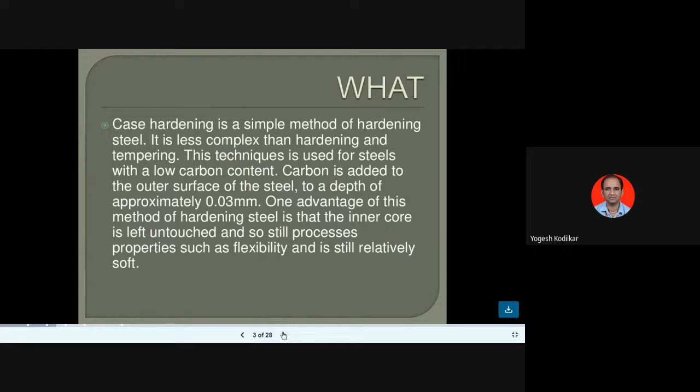So both types of surfaces can be achieved in this case hardening process. Such components require good toughness, but a very hard and wear resistant surface also, especially parts rotating against each other. Gears engage each other and rotate at several thousand RPM, so the gear must have good hardness and good toughness on the outer surface.

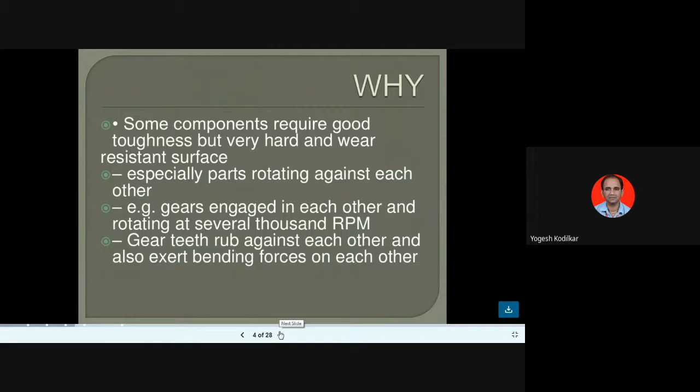Gear teeth rub against each other and also exert bending forces on each other. So carburizing and hardening. We're adding the carbon. In carburizing, carbon is added to a certain depth on the surface.

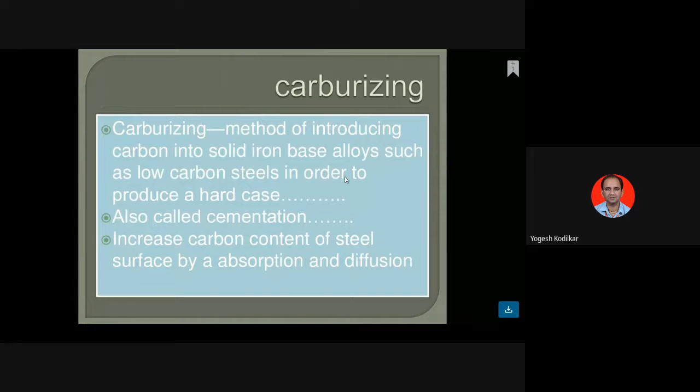So the outer casing must be harder, hard enough, while the core may remain as it is. That is the case hardening process. In case hardening only the outer casing is treated. Carburizing increases the carbon content of steel by absorption and diffusion.

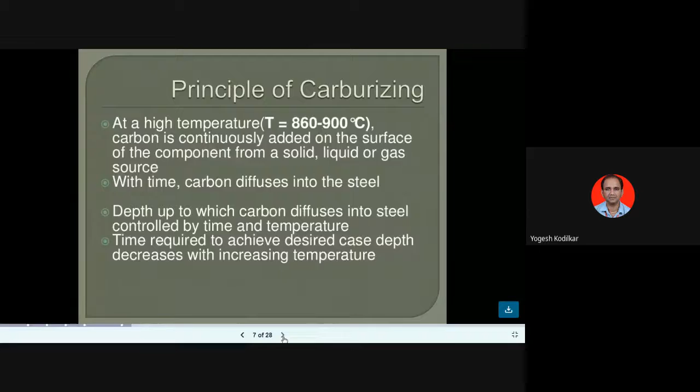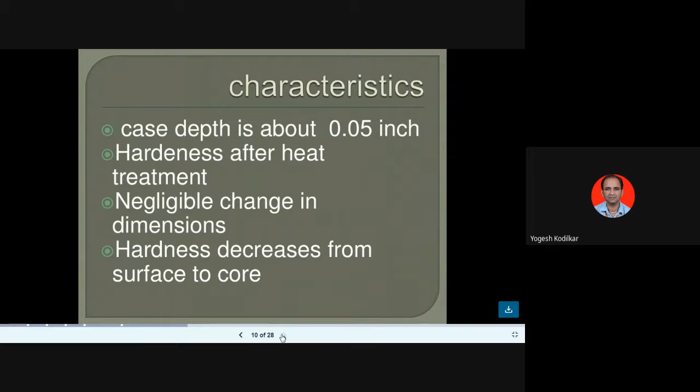That is the main characteristic. Then these are the three types of carburizing methods: pack carburizing, gas carburizing, and liquid carburizing. So pack carburizing involves packing components into a cast iron or steel box along with the carburizing material so that a space of about 0.50 mm exists. So that is pack carburizing, also called box carburizing. It involves packing the component.

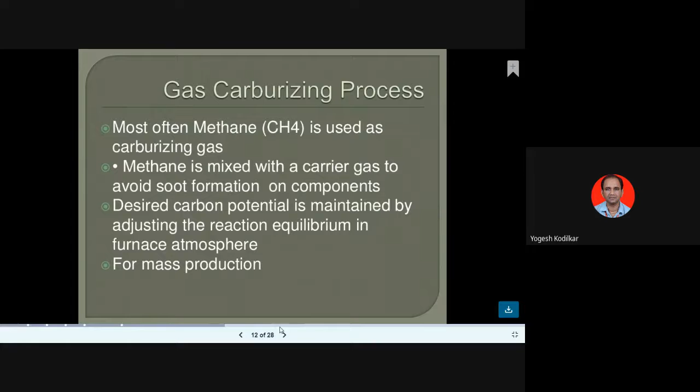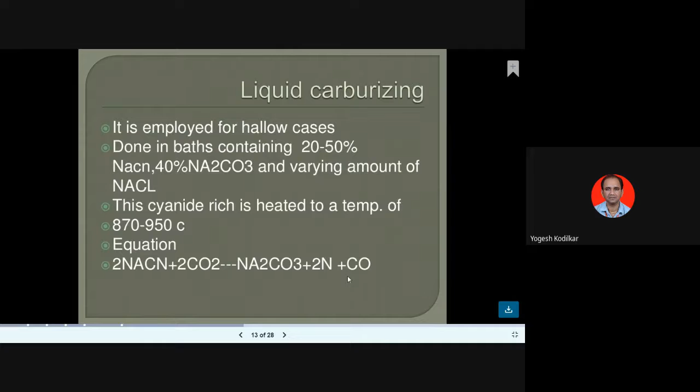Then third is liquid carburizing. It is employed for shallow cases, when I want case hardening up to less depth. It is done in a bath containing 20% to 50% sodium cyanide, 40% sodium carbonate and varying amounts of sodium chloride. This bath is heated to about 870 to 950 degrees Celsius and the sodium cyanide reacts, giving the carbon rich material. So that is liquid carburizing. The choice depends on the characteristics desired, the equipment available and the quantity of parts to be handled.

Then next, the case hardening process we learned is nitriding. In nitriding, the steel is exposed to a nitrogenous atmosphere.

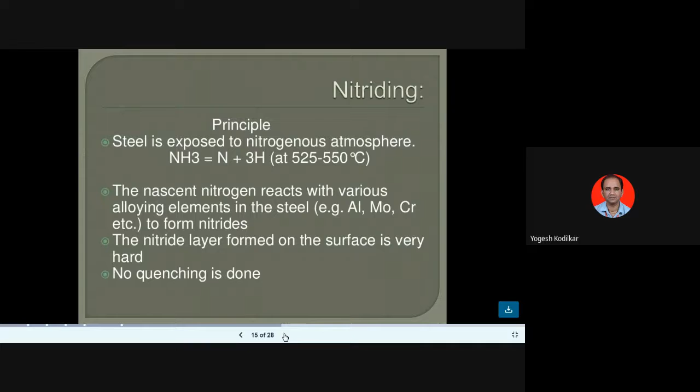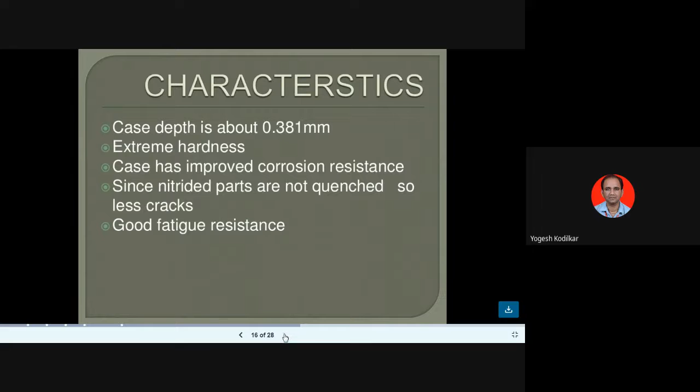The nitride layer formed on the surface is very hard. No quenching is done, since the surface is already very hard. Case depth is about 0.381 mm. Extreme hardness we can achieve. The case has improved corrosion resistance also. Since nitrided parts are not quenched, there is very less cracking and good fatigue resistance.

Then, just as we added carbon in carburizing and nitrogen in nitriding, similar to that there is the cyaniding process, called carbonitriding, in which we add both carbon and nitrogen. So in cyaniding, carbon and nitrogen are introduced into the surface of steel by heating it to a suitable temperature and holding it in contact with molten cyanide.

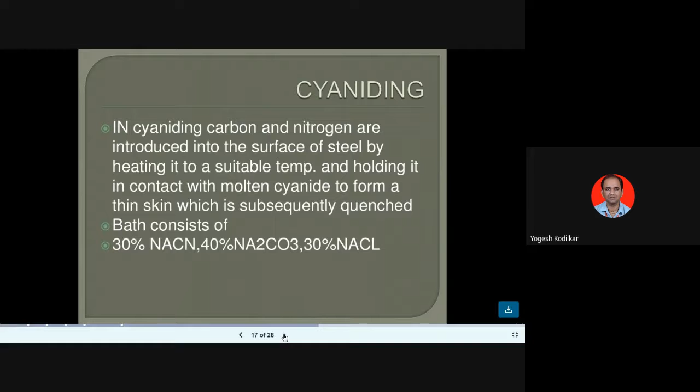Molten cyanide च्या quantity मध्ये ठेवायचं थोडा वेळ to form a thin skin which is subsequently quenched. So bath मध्ये काय असतं? 30% sodium cyanide, sodium carbonate is 40% and 30% sodium chloride. So case depth about 0.25 mm we can achieve. Negligible changes in dimensions. Distortion may occur. Typical uses: screws, nut bolts, small gears are given the cyaniding heat treatment.

Then we studied surface hardening also. That is induction hardening. So induction hardening मध्ये काय करतो? We are keeping that component which is to be given the hardening by induction hardening. That component we have to place in that induction coil.

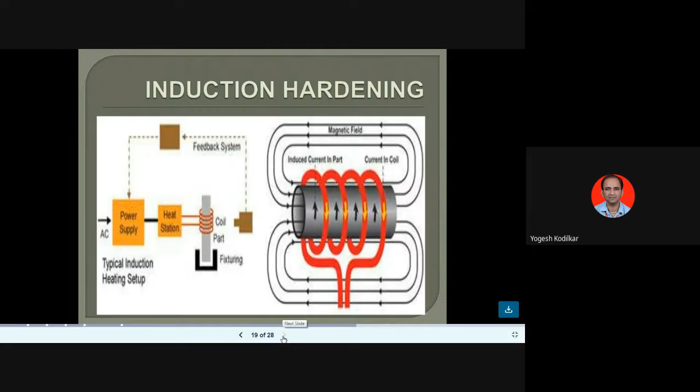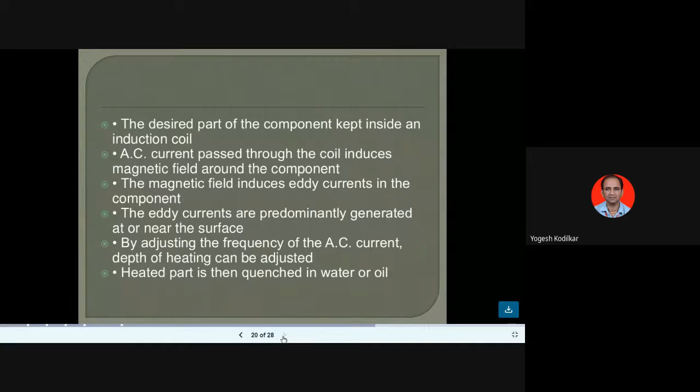The desired part of the component is kept inside an induction coil. Induction coil मध्ये ठेवला जातो तो. AC current passed through the coil induces a magnetic field around the component. The magnetic field induces eddy currents in the component. The eddy currents are predominantly generated at or near the surface. By adjusting the frequency of the AC current, depth of heating can be adjusted. Heated part is quenched in water or oil. Water मध्ये or oil मध्ये quenching केला जातो.

Induction hardening is used where selective parts of heavy duty components have to be case hardened. Heavy duty component मला जे काय harden करायला लागतं तेव्हा मी induction hardening वापरतो. Since no carburizing is done, the induction hardened part has medium carbon content, typically equivalent carbon content of 0.4 to 0.45%. Examples of applications are crankshafts, ज्यांना induction hardening करायला लागतं.

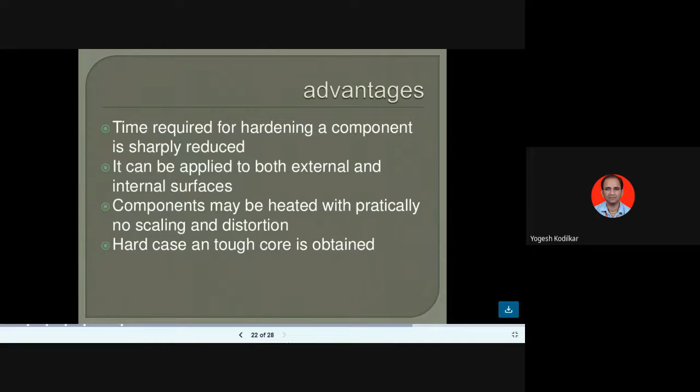त्याचे advantages काय आहेत? Time required for hardening a component is sharply reduced. It can be applied to both external and internal surfaces. Components may be heated with practically no scaling and distortion. And hard case on tough core is obtained. Core कशी असते? It remains tough as it is. हे disadvantage आहे: cost of equipment is high. Induction hardening मध्ये cost is high.

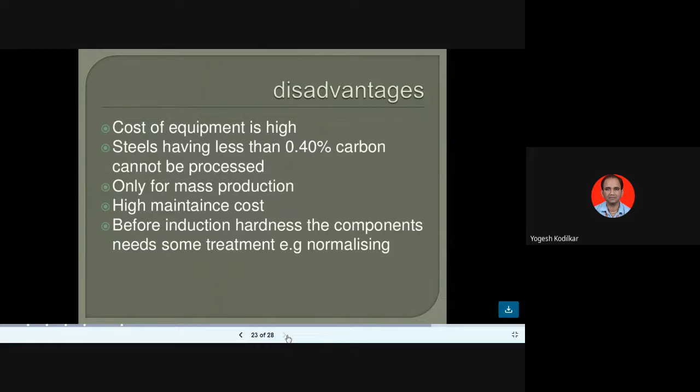Steels having less than 0.40% carbon cannot be processed. त्या स्टील मध्ये 0.40% कार्बन कमी आहे त्यांना प्रोसेस करू शकत नाही आपण, and it is only used for mass production. Maintenance cost is also high. And before induction hardening, the component needs some heat treatment like normalizing. त्याला normalizing heat treatment करावी लागते.

Then flame hardening आपण शिकलो बरोबर. What does flame hardening mean? Flame hardening is a surface hardening method that involves heating a metal with high temperature flame followed by quenching. It uses medium carbon mild or alloy steel or cast iron to produce a hard wear resistant surface. Flame hardening uses direct impingement of an oxyacetylene flame, oxygen and gas flame, onto a defined surface area. ज्या surface वर मला hardening करायचं त्या surface वर मला heating करायचं आहे.

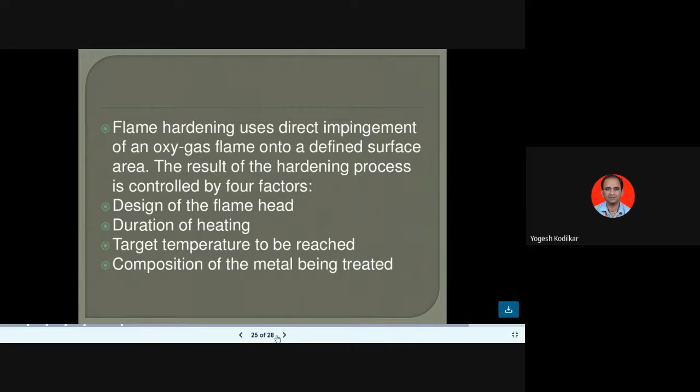The result of the hardening process is controlled by four factors: design of the flame head, duration of heating, target temperature to be reached, and composition of the metal being treated. ठीक है. Now these are the four types of flame hardening: stationary flame hardening, progressive flame hardening, spin flame hardening, and combination flame hardening.

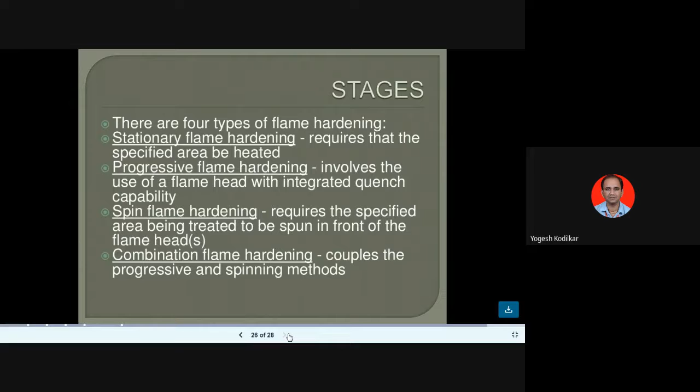Advantages काय आहेत flame hardening चे? Increased wear resistance, less distortion, reduced processing time, ability to use low and medium carbon steel, reduces cost by hardening only selective areas, and achieves high hardness, less machining and grinding than other methods. So that is your case hardening and surface hardening.

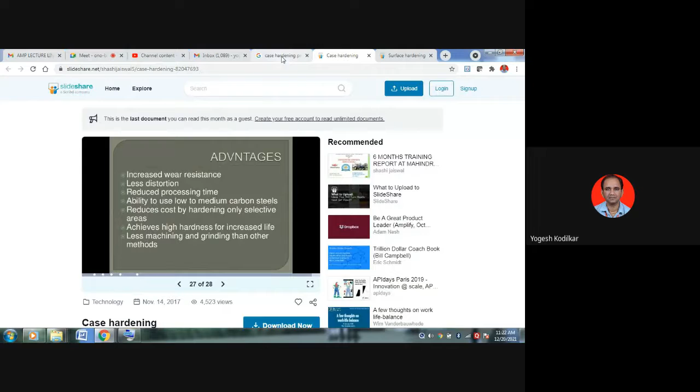Now we'll see the difference between case hardening and surface hardening. You know, the important part in previous offline question, case hardening process and...

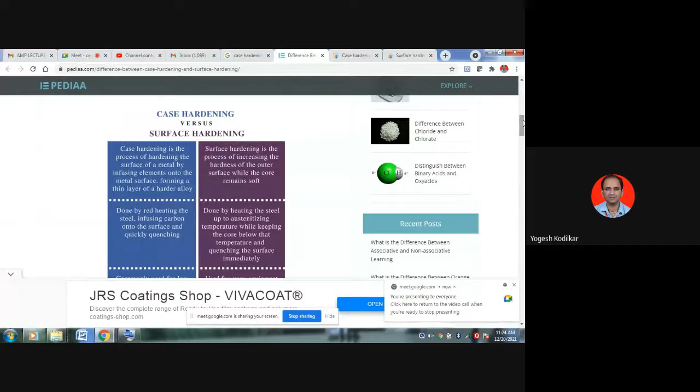मग केस हार्डनिंगमध्ये आपण बघितलं, we are changing the chemical composition. Whereas in surface hardening there is no change in chemical composition. We are just only heating. So पहिला डिफरन्स बघू. Case hardening is the process of hardening the surface of metal by infusing elements onto the metal surface. बरोबर, त्यात काय diffuse केलं होतं ना, diffusing होतं, infusing होतं, forming a thin layer of harder alloy.

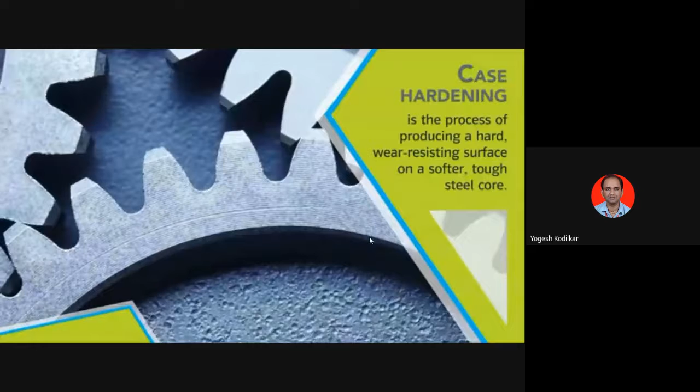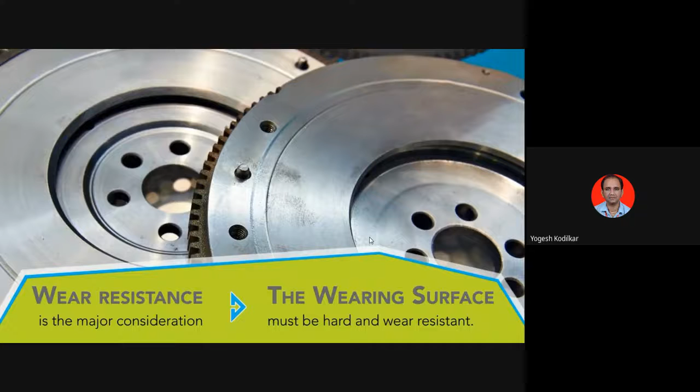Case hardening is the process of producing a hard, wear-resisting surface on a softer, tough steel core. In many metallurgical applications, strength is of minor importance and wear resistance is the major consideration. In such cases, the center condition of the steel is relatively unimportant as long as the wearing surface is hard and wear resistant.

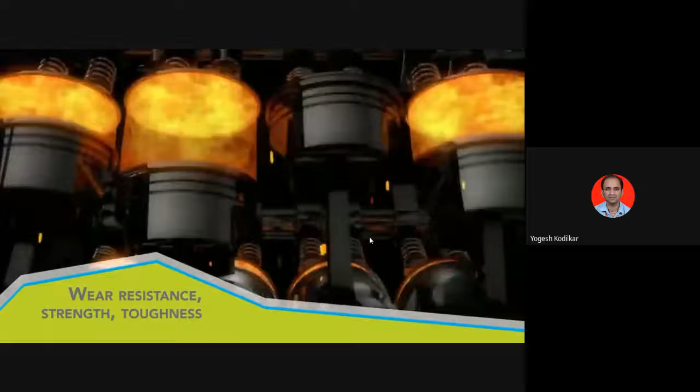In other applications, where wear resistance is still the prime consideration, a high level of strength and considerable toughness are also required. In such cases, a hard wear-resistant surface backed up by a strong and tough core is necessary. To produce the two conditions just described, it is necessary to depart from the conventional hardening treatments and employ specialized techniques that result in a relatively thin surface layer of the steel being hardened. This thin layer is termed the case.

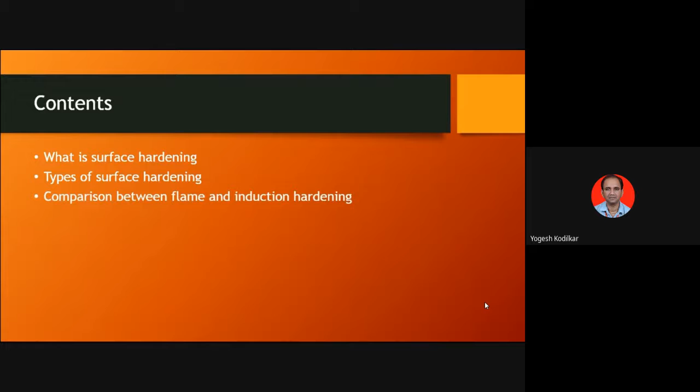So let's begin with our today's video. So what we will be discussing today is what is surface hardening, the types of surface hardening, and then we'll compare flame hardening and induction hardening. Okay. So let's begin. What is surface hardening?

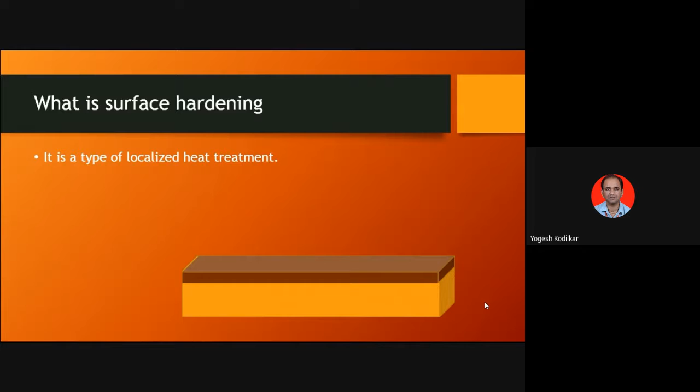Surface hardening is nothing but a process in which we are trying to alter the surface properties of the component, and we are not going to change the inner core properties of the component. Okay. So it is nothing but a localized heat treatment. The entire component is not getting hardened, or the entire component is not getting heat treated.

Only a particular area or a particular surface of the component is getting hardened. And the main thing to keep in mind is in surface hardening, the chemical composition of the component is not changed. So what we are trying to do over here is we are just trying to heat the particular surface of the component and then immediately we will quench it with water. Now based on this heating, there are two methods, flame hardening and induction hardening.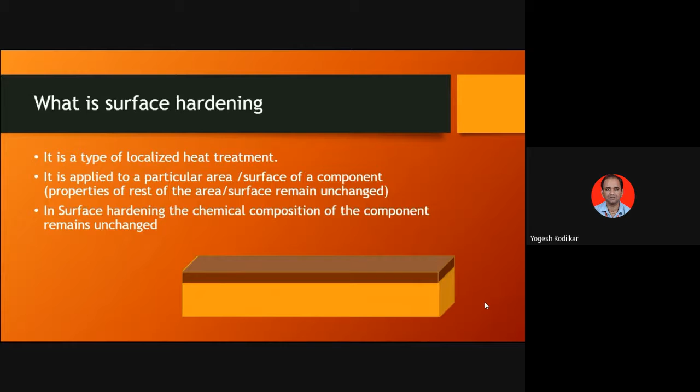So in case of flame hardening, what I will do is, this is my component. I will try to heat it with the flame. Now as I start heating it, the surface becomes red hot. Now as it becomes red hot, immediately I'll quench it with water. As I immediately quench it with water, I get martensite at the surface, which makes the surface hard.

The main difference between flame hardening and induction hardening is the type of heating. In flame hardening, I'm using a torch. In induction hardening, I'm using induction heating. So let's see the difference. In flame hardening, we are using the gas or a torch to heat the surface. In induction hardening, we are using a heating coil or induction heating.

And another thing is, in flame hardening, as the heating is manual, the depth of hardness is not uniform. Because in this case, this flame is not going to have a uniform heating all over the surface. So because of which, I am not going to get a uniform depth of hardness all over the surface in case of flame hardening.

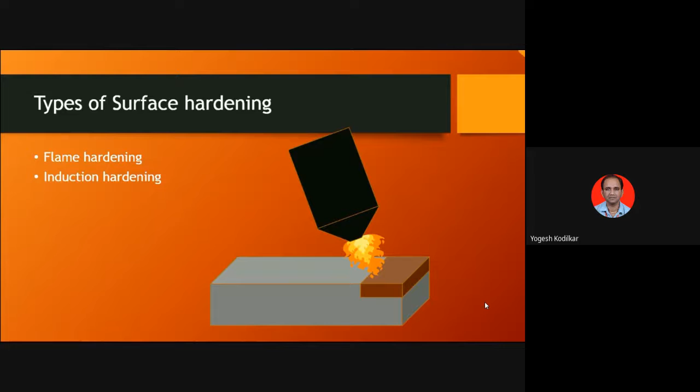But this is not going to happen in case of induction hardening. Due to induction heating, I am going to get a uniform depth of hardness. So every time we are using induction hardening for doing surface hardening. Flame hardening we are using a bit less because the depth of hardness is not uniform. So this was the main difference.

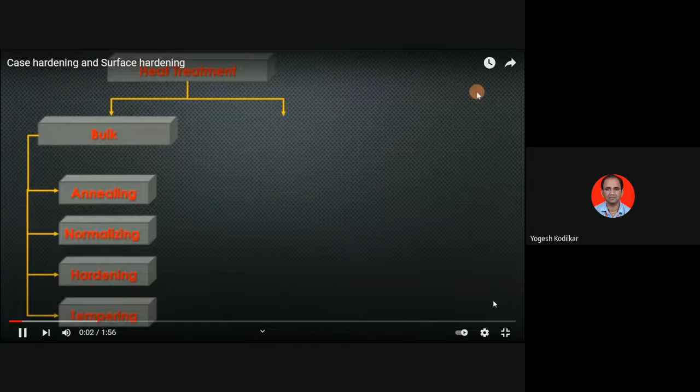In my previous video, we were discussing annealing, normalizing, hardening, tempering. All these processes are done for the entire component. Today, let us discuss something called localized heat treatment. In this, a particular surface or a particular area is getting heat treated. That's also known as surface hardening.

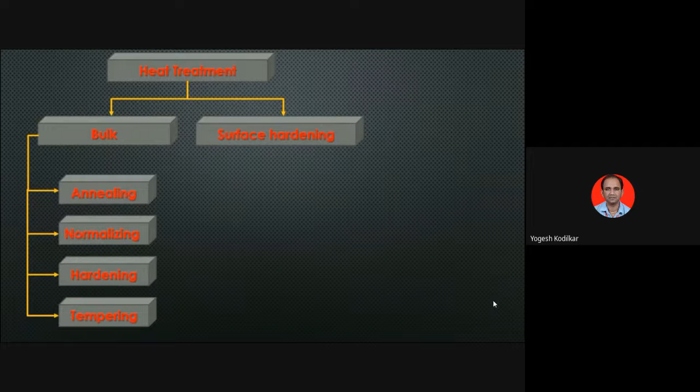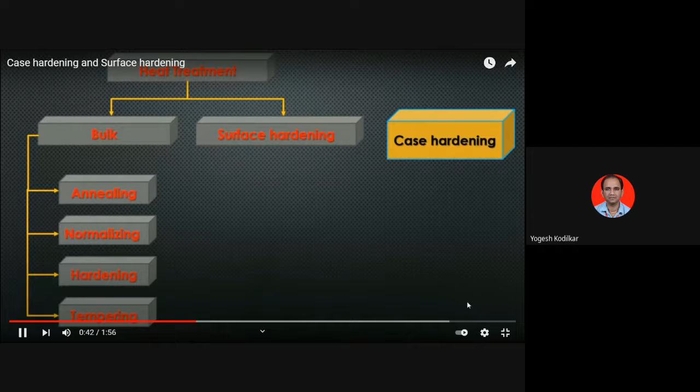Whenever we hear surface hardening, one word comes in our mind, that is case hardening. See, case hardening and surface hardening are different processes. Let us understand the difference between surface hardening and case hardening. The aim of both the processes is the same, that is to treat the surface of the component without impacting the inner core or the inner region.

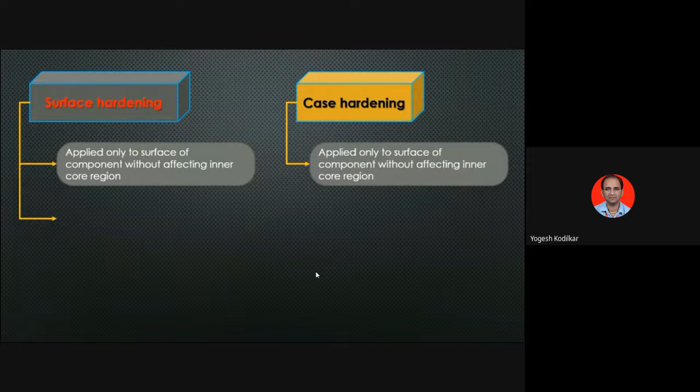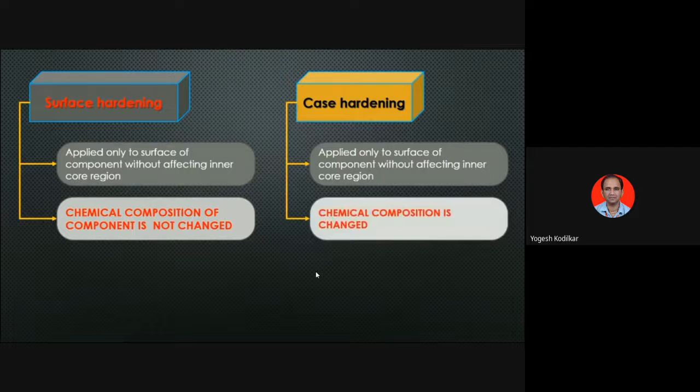and case hardening is done for those components which are having low hardenability. For example, surface hardening will be done for medium carbon steel or high carbon steel. And case hardening will be done for low carbon steel, like mild steel.

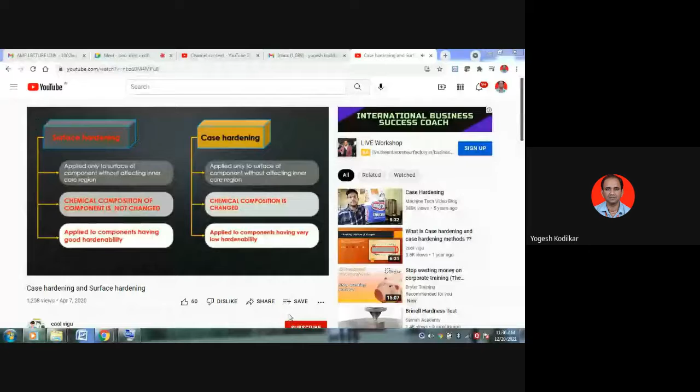Hi, I'm Adam. And I'm Todd. This is the Machine Tech video. And today we're going to show you how to case harden steel.

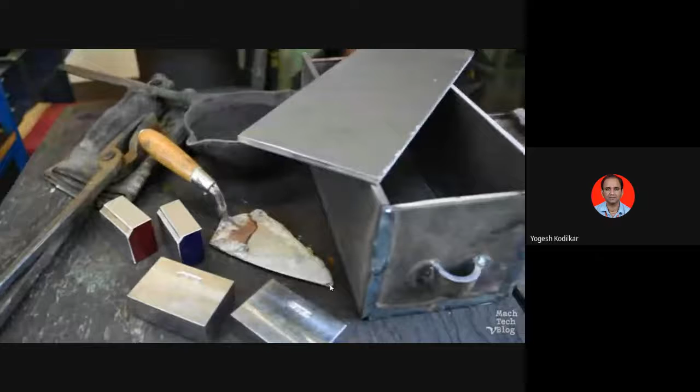One of the most common projects for machinist apprentices and students is to make these 1-2-3 setup blocks, which machinists use for practically everything in the shop. They're rough machined and then surface ground to precision parallelism, perpendicularity, and flatness of the surfaces.

Since they're going to be used as tools, it's common to heat treat them to harden them so that they're more wear resistant. But the problem is that these are made out of 1018 steel, which is a low carbon grade. It's a good general purpose steel, but it doesn't have enough carbon content to really heat treat and harden properly in the furnace. The solution, of course, is to add more carbon.

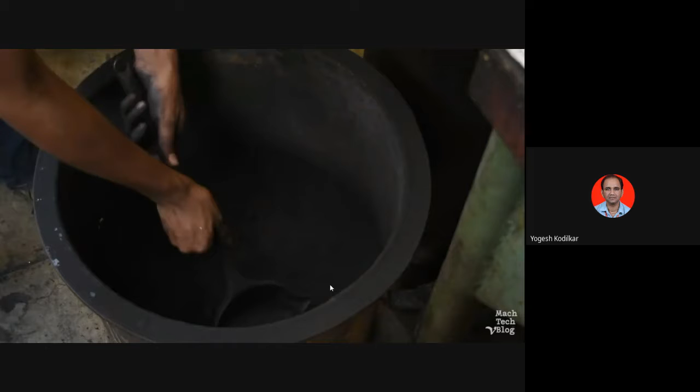Lay down about an inch of carbonaceous material in a steel box with a tight-fitting lid. Yes, we really are using broken-up charcoal briquettes because it actually works pretty well.

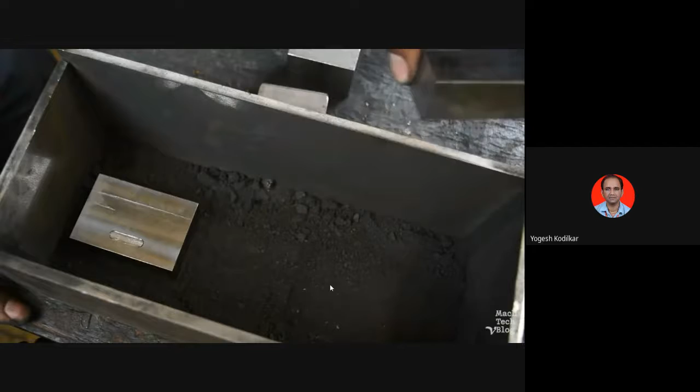Arrange the blocks so that they're not touching each other or the box. Go ahead and put in one or two pieces of 1018 steel scrap so we can test the hardness later without putting divots in the finished parts.

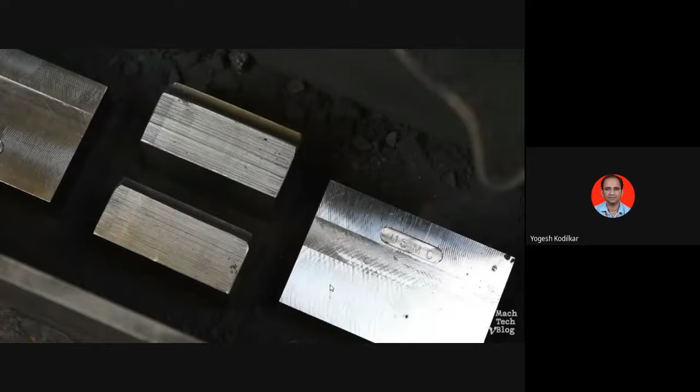Then pour enough carbon on top of the blocks to cover them by at least one inch.

Put the lid on top of the box and fill in any gaps with fire clay or refractory mortar to form an airtight seal. The mortar should ideally be a little thicker than this.

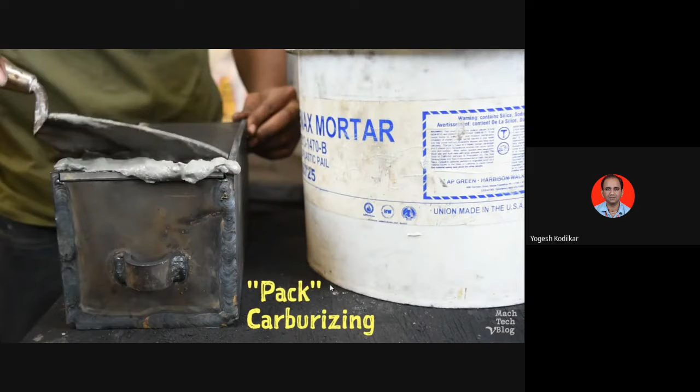The method we're using to add carbon to steel is called pack carburizing. Pack carburizing is only one of several ways to add carbon to steel, and it's the slowest and most labor-intensive method. For this reason, it's not really a viable commercial process anymore, but it is used frequently in small shops.

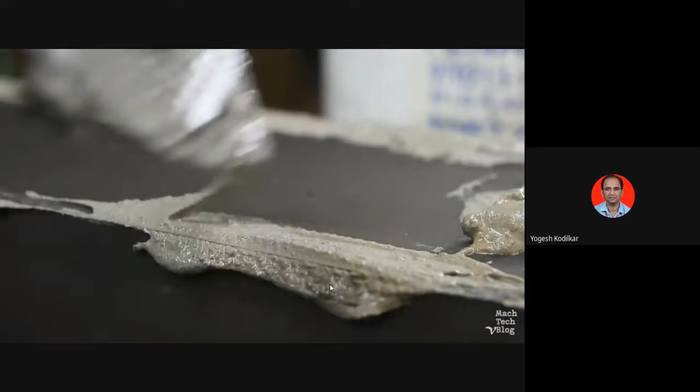Now it's time to load the box into the cold furnace.

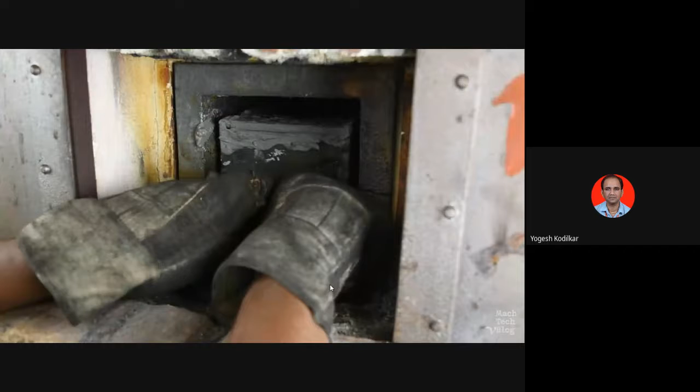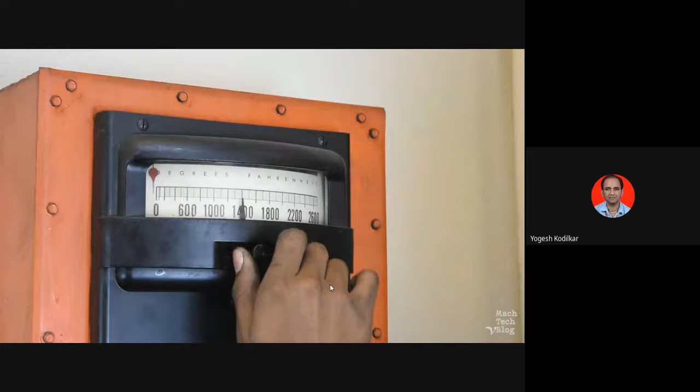We'll leave the box in the furnace to carburize for 8 hours.

Since we've got some time to kill, let's measure the hardness of a piece of untreated 1018 steel using a Rockwell hardness tester.

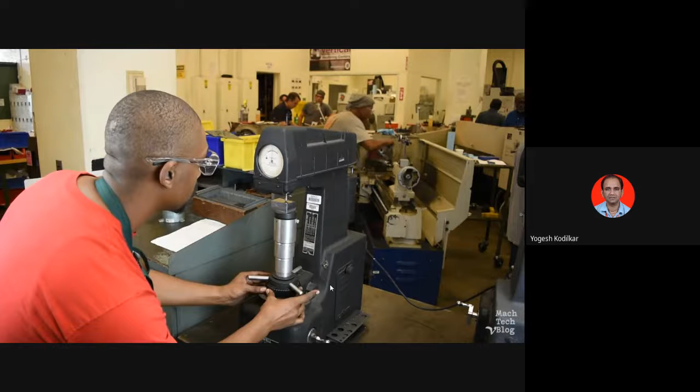The test is simple. An indentation is made in the material using a diamond tip and a calibrated force. The size of the indentation determines the material's hardness. The diamond tip will penetrate deeper into the surface of softer materials than harder materials. A higher number on the Rockwell C scale indicates a harder material, with the scale topping out at 100.

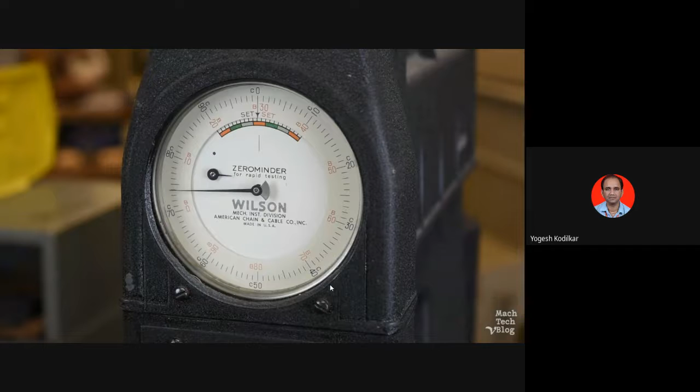Our untreated piece of 1018 steel comes out to 10 Rockwell C, which is really not very hard at all.

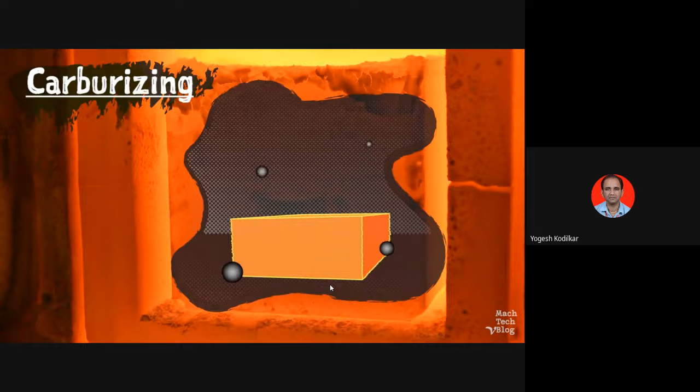But inside the furnace, there's a bit of science magic happening. Carbon-rich gas comes in contact with the metal surface, breaks down, and some amount of free carbon is dissolved into the hot steel. Time, temperature, and the composition of the atmosphere all affect the rate at which carbon is absorbed and how deeply it penetrates into the steel.

After 8 hours at 1700 degrees, the carbon should penetrate 1/16 of an inch into the part.

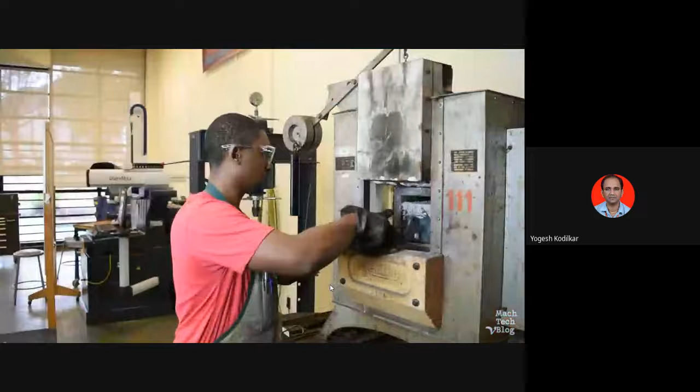After letting the parts cool in the furnace overnight, it's time to take them out.

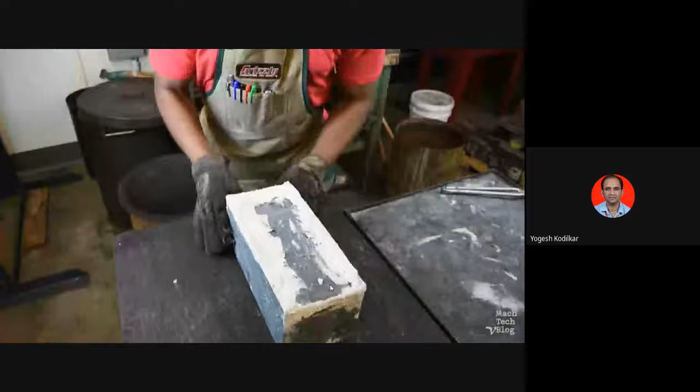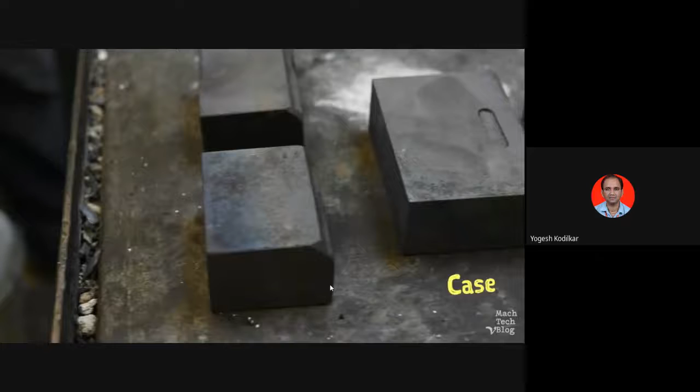Remove the carburized parts. They're still soft right now, but the finished parts will have a tough, low-carbon core and a hardened, high-carbon surface layer called a case. This is because the carbon only dissolves to a certain depth, so the hardening process will only affect the outsides of the parts. That's what makes this process case hardening as opposed to through hardening.

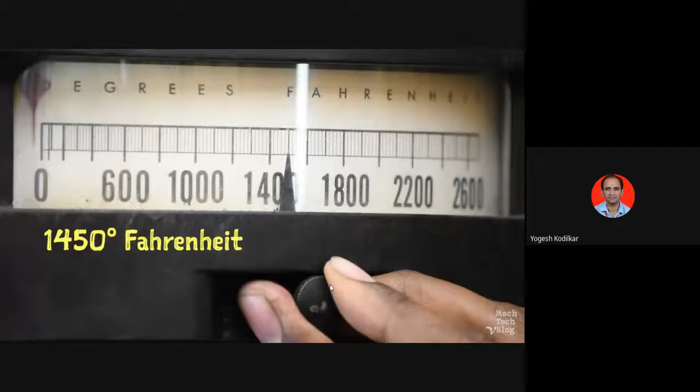Turn the heat up to 1450 degrees Fahrenheit, and then put the parts back into the furnace. We only need to get the parts up to temperature, so 10 to 15 minutes should do the trick.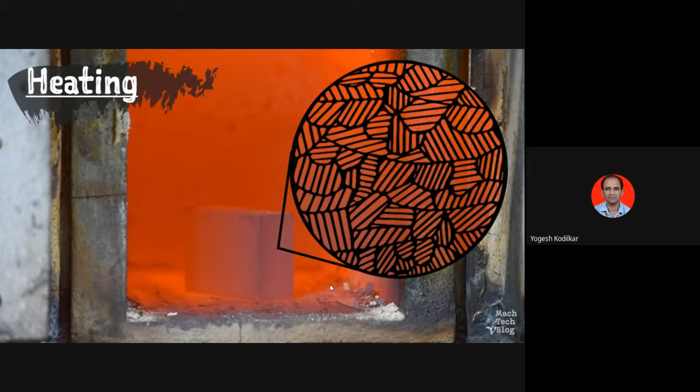At room temperature, the microscopic structure of the high-carbon steel is composed of alternating layers of iron and brittle iron carbide. This microstructure is known as pearlite. As the steel gets hot enough, the pearlite dissolves, and the microstructure transforms into a non-magnetic solution of carbon and iron called austenite.

Once all of the pearlite is dissolved, it's time to quench.

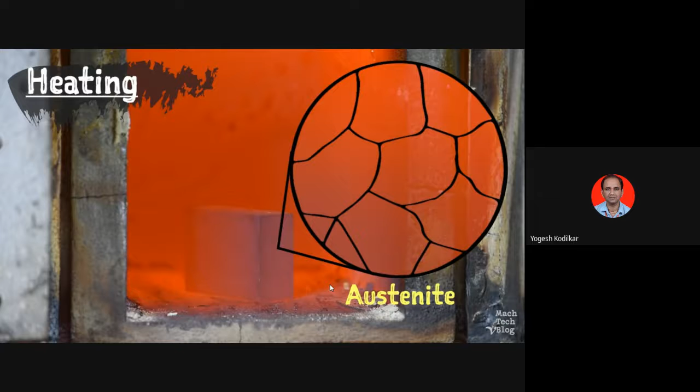Pull the parts out with a set of tongs. Quickly plunge them into a container of water and agitate the parts in a figure-8 motion until they're cool to the touch.

Because we're cooling the steel so rapidly, the austenite won't have enough time to separate back out into iron and iron carbide. The resulting steel microstructure, called martensite, is composed of needle-like shards of iron supersaturated with carbon.

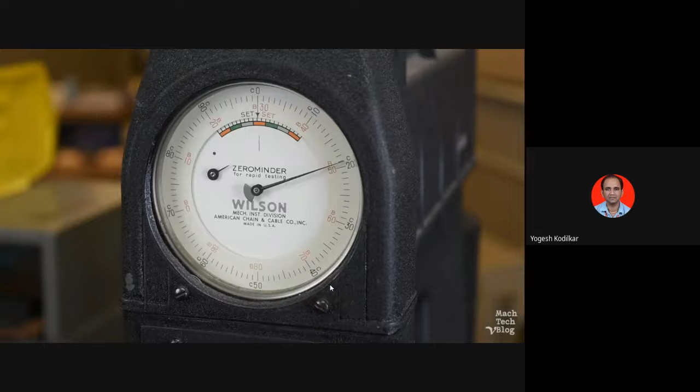Martensite is very hard stuff indeed, but the harsh process of quenching leaves a lot of internal stresses in the steel. And that's why it's common to stress relieve quenched parts by heating them back up to a relatively low temperature and holding them at that point for some amount of time.

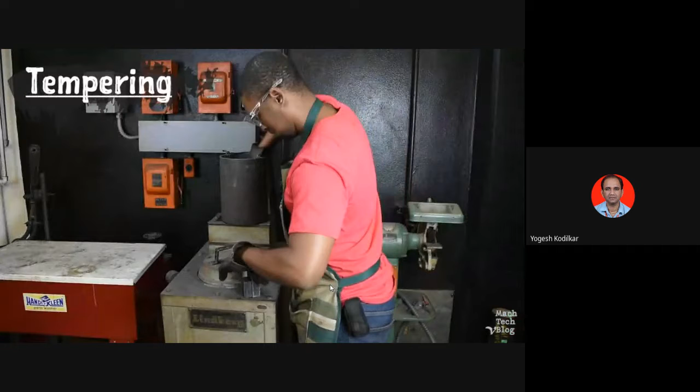So let's go ahead and heat up the draw furnace to 400 degrees Fahrenheit. Place the parts in the basket and lower them down into the furnace. Make sure to replace the lid.

By the way, this part of the process is called tempering or drawing.

One hour should be plenty of time.

Remove the parts and let them air cool at room temperature. Don't go dunking them in water at this point.

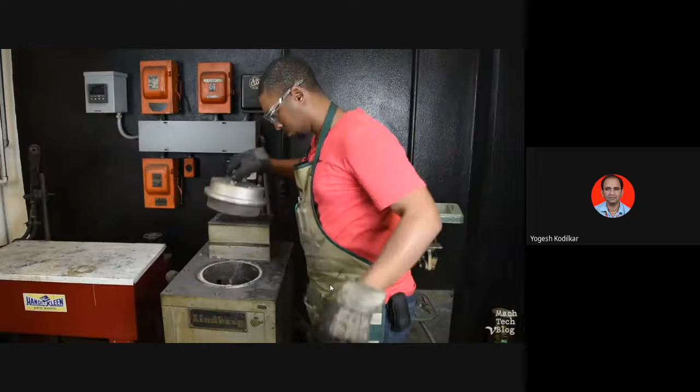It's normal to lose a little bit of hardness during the tempering process, but these parts are ready to be finished machined on the surface grinder.

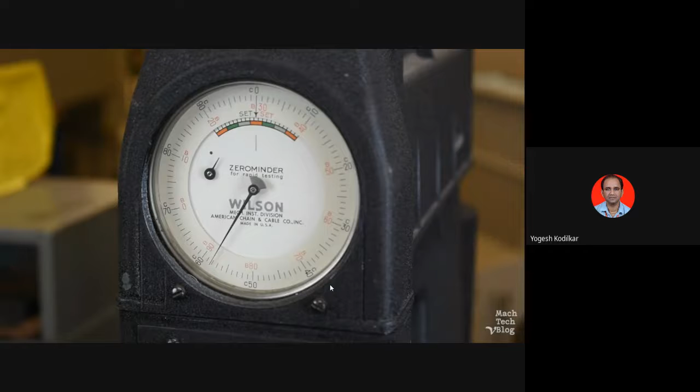So that's the basic procedure for hardening high carbon steel. And that's it for today for the Mach Tech video blog. I hope.

So students, in this way, we have studied our surface heat treatment processes and case hardening heat treatment processes.